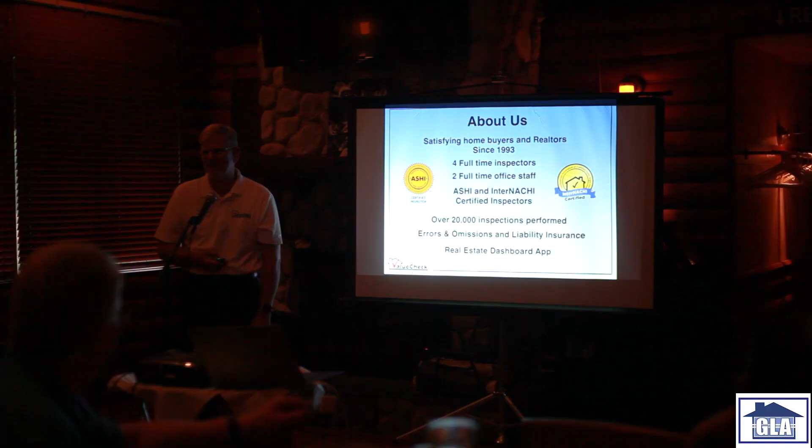Also, just for your knowledge, we're fully insured. We have errors and omissions insurance for inspection needs, but also general liability in case we're in a home and we break something, which is rare, but it can happen.

So here's a list of our services, and it's pretty much what you would expect a home inspector to do. We do residential inspections, investor inspections, commercial inspections, well and septic testing, sewer scope, which we'll talk a little bit about later. We have two sewer scopes and we do quite a bit of sewer scoping, and that could really benefit investors buying older properties or landlords, or people complaining about sewer drainage - but we can really get in there and see what's going on.

Of course, we do radon testing, mold testing, wood destroying insect inspections if you need that for VA or FHA mortgages or any other purpose. Also, we do some expert litigation work, testifying in court, and then we like to think of ourselves as historic home specialists. If you look at areas like Fenton, Holly, Flint, Flushing - so many of these places have 100-plus-year-old buildings and homes, and we do those a lot. And they all have their unique problems, right? So you kind of have to know what you're looking at.

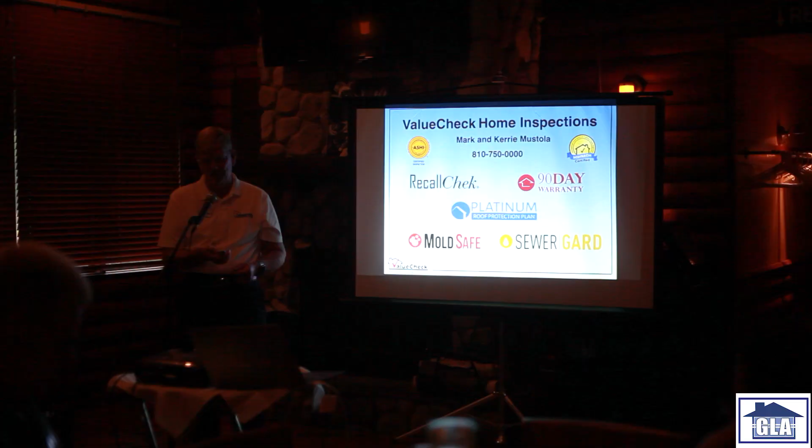I'm not going to go into these because of time, but with all of our home inspections, these are warranties and programs that just come with them. And if there was time and you wanted to talk about it, we could have described them, but that's not really what we're here to talk about.

So what we really want to start here, hopefully you can see some of these pictures. We wanted to talk about leaky foundations and leaky basements. Now this is really an excerpt - we have 12 classes that we're certified to give realtors CE credits for continuing education. So our class on foundations and leaky basements, that takes a minimum of an hour alone.

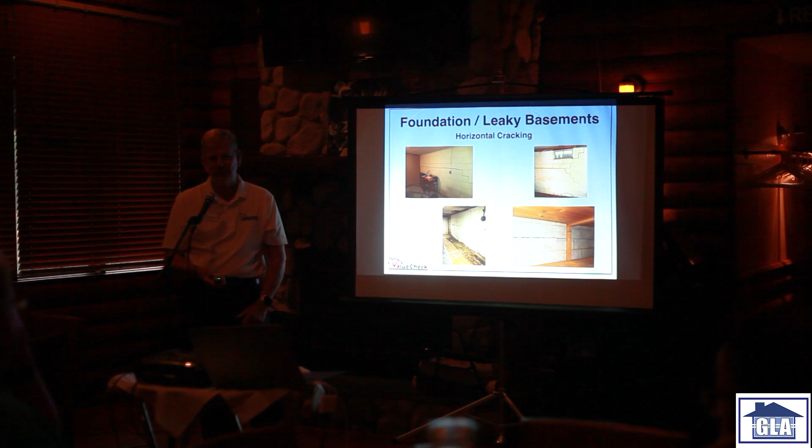So certainly when these walls are bowed in, there are repair options. I've shown several of the repair options here, I think you can see that pretty good. If you look in the upper left-hand corner, those are pilasters. Have most of you seen steel pilasters installed on walls? It's fairly common. What they're really doing is taking a steel beam - I've seen angle iron, channel iron, even 2x6s built up a couple wide - and securing that to the floor and to the ceiling of the basement. What that does is help the wall resist any further movement.

Typically when you have a big foundation repair, you want to fix the root cause and then make sure it doesn't get any worse. It's not practical to push the wall back where it was, because the only way to do that is to dig on the outside all the way down to the footing, and no one wants to do that. It'd be nice if you could, but landscaping, porches, sidewalks, driveways, patios, decks, gardens - everything is in the way. And we've already got a hole in the ground, an 8-foot hole that you could work with. So our goal is, as long as that wall is not in danger of imminent failure, let's brace the wall.

So here's some different methods. In the upper right-hand or upper left-hand corner, you see the steel pilasters. In the upper right-hand corner, those are metal plates. How many people have seen those plates on the wall? I just saw one two weeks ago, and it was a brand new repair.

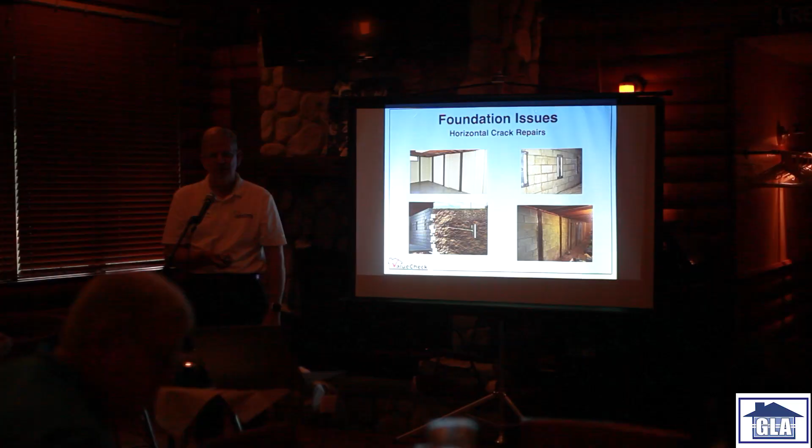So of course, when you have this wall bowed in, you're almost always going to have some water, because the root cause was the water. So what I'm trying to show you here is an example of what people call a B-dry water system. B-dry is just like saying Kleenex instead of facial tissue. It's a national company, everybody knows it, but there's lots of companies that put in these types of waterproofing systems.

And they're really very effective. So in the upper left-hand corner, that's what you're likely to see if you just walk into a basement. You can see where along the floor, the cement was broken out everywhere, and then you'll see a little plastic panel up on the wall. That's the waterproofing system.

But if you really didn't know what caused that, I've tried to give you this little diagram here. So here's your typical concrete block wall. You've got water in the soil that wants to come through the block wall, and sometimes it can come through, you see it all the way up to the frost line. Sometimes 2 or 3, 4 feet high. Other times just at the base of the floor.

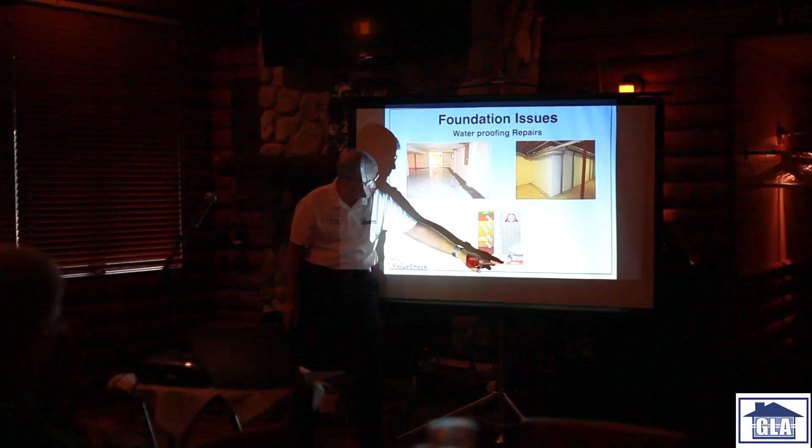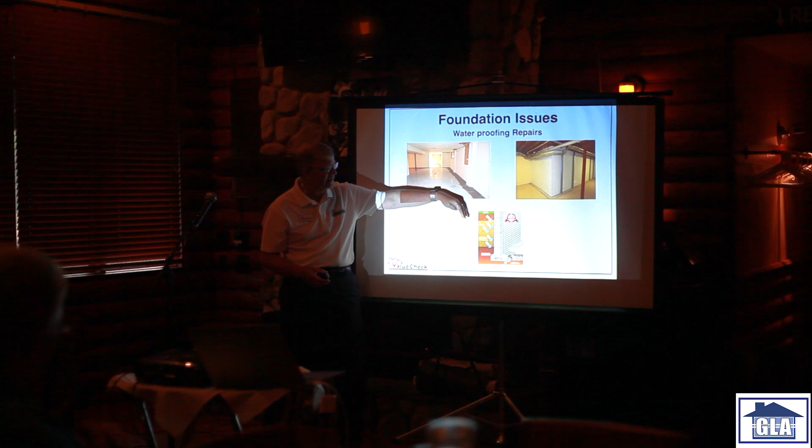So when you have a system like this, what they've done is broken out the floor to add some drain tile to collect the water, and then they'll put in the sump pump, if one doesn't exist, so they can pump that water away. And then the plastic that you see coming up on the wall, they'll drill some holes in the block, because any water that's pounding against the wall, filling the block, you want to get that out of the block wall as fast as you can, so it can't build up that additional pressure. It can't be there in the winter when it freezes.

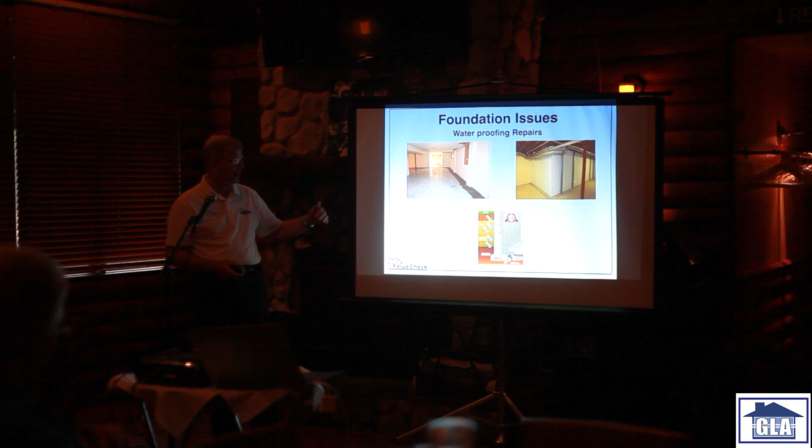So that's what we're doing. We're just trying to control the flow. We're collecting the water that's in the block, letting it come through the block, behind the plastic, and then down into the drain tile. Usually when you see those installed, most times you'll see a 20-year warranty, sometimes a lifetime warranty. They're really very effective. We've come across thousands in the 30 years that we've done this, and very rarely do we see them failing. So they're pretty reliable systems.

Now, of course, like I said with the foundation, it would always be better to fix it from the outside if you can. But it's just not practical. The expense is too great because you have to dig, so they always like to try to fix it from the basement. Same with a poured foundation when you have a vertical shrinkage crack—you're going to repair that if it's leaking water. Your best bet is just to epoxy it from the basement because you're already down there.

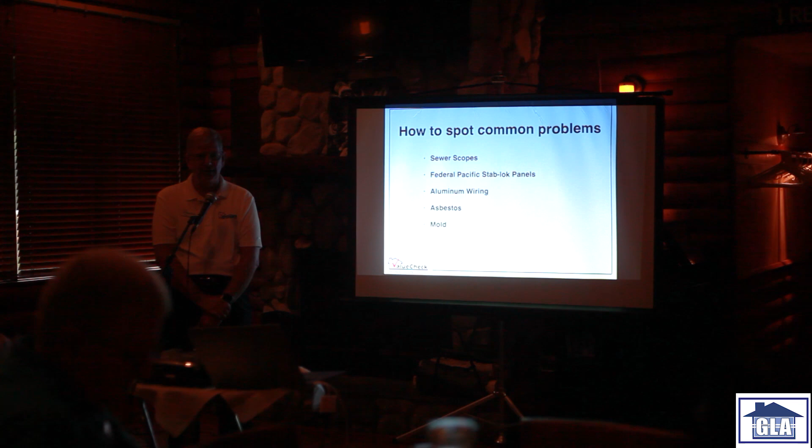So, some common problems. Well, the first thing is sewer scope. I know there's - do you do sewer scopes too, or did you just do drain cleaning?

I'm glad you addressed me, because if you guys want to see real life pictures of everything he just described to you on the basement waterproofing, I got real life pictures about everything he just did. The only thing I haven't done is those fiber straps that he was talking about, but I'm really interested in seeing how those work. I actually cut the floor just like he was describing. We drill holes in the block, lead the block. I also use the FRP board for what you were calling the B-dry system.

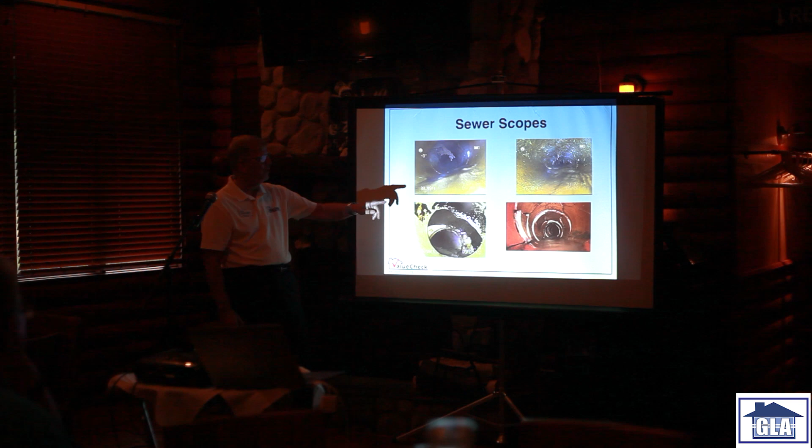This picture over here, you can see this is your drain line, so only about a quarter of that line is open. If you're looking at a house that's for sale, or a vacant house, and you run all the water, that pipe is still going to drain fine, because all you're doing is draining water down there. But as soon as you get a tenant in there and they start flushing other stuff down the toilet, it's not going through that, and you wouldn't have known it.

So in this case with tree roots, sometimes you can't see the pipe very well because the roots are in the way.

Sometimes you can't get the sewer scope past the roots if it's a big enough blockage, so you don't know the condition of the pipe. At the very least, you have to have it cleaned out, and then you'd have to have it re-scoped. This one here is a good example.

This is a house we did that was only 20 years old, and this is a big offset. Here's one pipe and here's the other pipe. It was offset so far that the majority of the sewer leaving the house was getting right out and going into the soil around the house. This was in Flushing.

I think it was like 24 years old, and it was basically from settlement. It had been like that for a while. When they built the house, the backfill against the foundation ended up settling and busted that pipe, and it was like that for a long time.

And that was $4,500 to fix it, and that was because it was just in one spot. They knew right where it was at because they dug down.

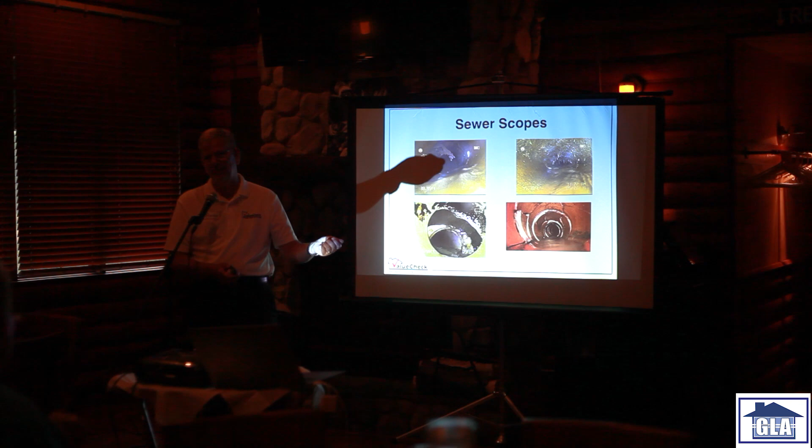Our sewer scopes, and I'm sure most sewer scopes are like this, have a counter on them, so we know exactly how far it is. So sometimes it's showing me that I took one right turn and I'm out 45 feet. I'll go out there and pace it, like, okay, this is right underneath the maple. So sometimes we can identify that.

Here's another example, that's an old clay drain tile. Almost everything you're going to see in older areas of Flint and Genesee County is still going to have clay tile going out to the road. But some of it's cast iron, and cast iron in the house, cast iron in the basement. As soon as you start getting out into the yard, it's clay tile.

Here's an example of one that over time is just deteriorating, it's broken. When you see a thing like that, when you're looking at a house, you probably wouldn't find it because the drains are still going to drain great. But there are so many offsets and broken sections that it's going to start collecting debris, and very quickly you're going to have a problem on your hands.

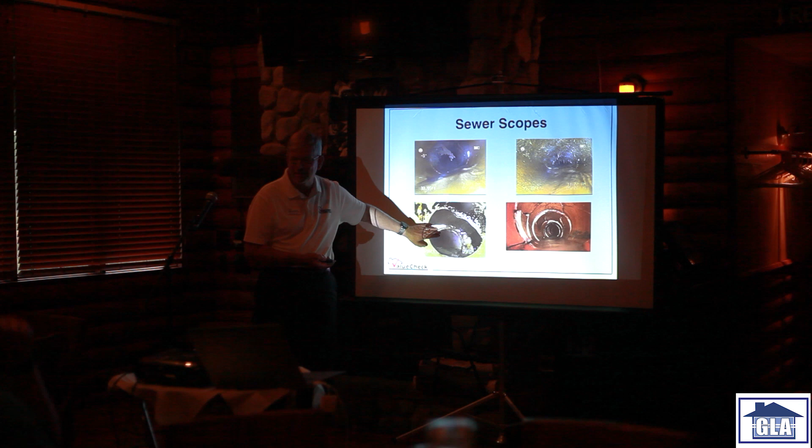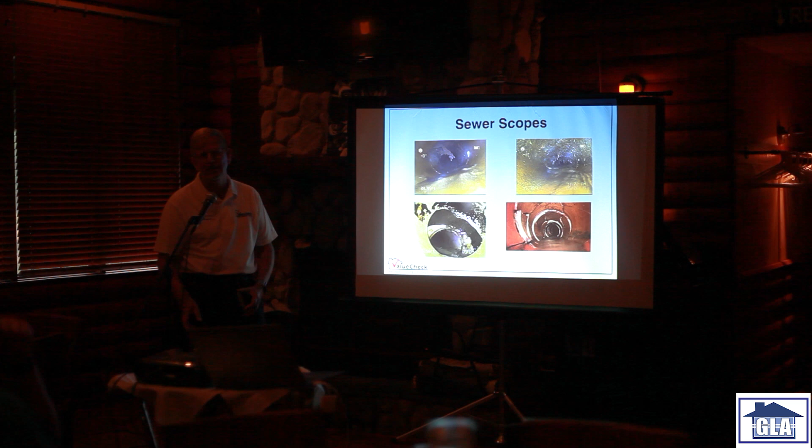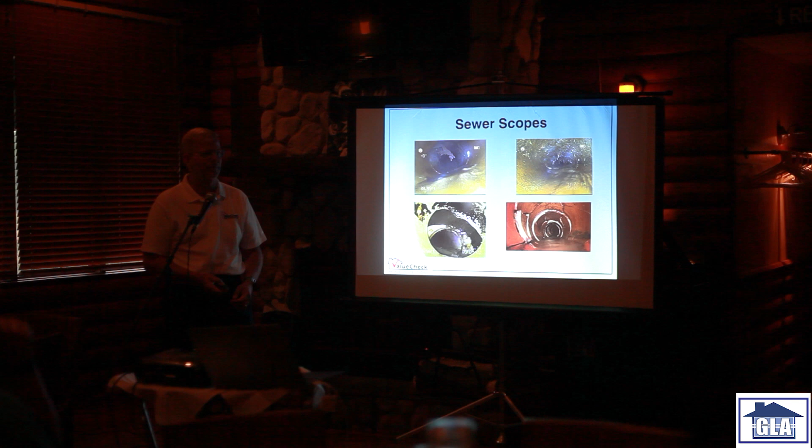Something like this, you can just dig up and replace the fitting. Something like that is just going to require replacement of the pipes. There's multiple ways to replace it - I know we don't want to get into a lot of it. Sometimes they dig it up and replace it all. Sometimes there's a system called pipe bursting where they can dig every 20 feet and pull a new pipe through and burst it along. There's also a cured-in-place system. So there's multiple ways to fix it.

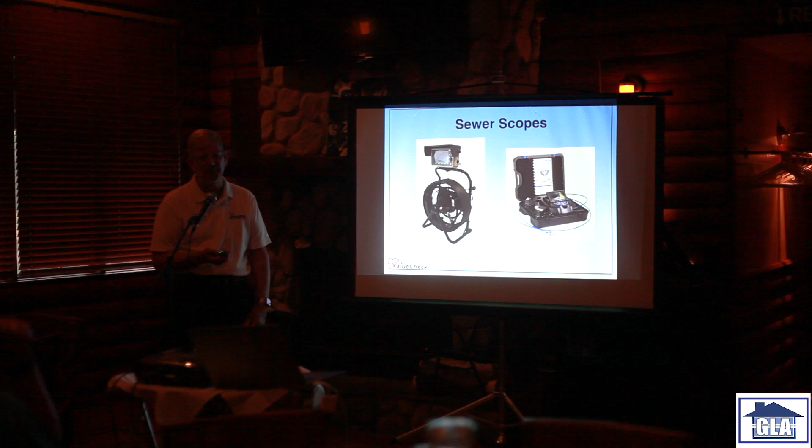That's just a picture of the two sewer scopes that we have. They're pretty expensive pieces of equipment, but they're very nice. We can get you a color video of the entire underground line so you can see the condition.

So have any of you run across these or had problems with it? Had one today. Yeah? Yeah. Yep, so I mean, we see these probably at least once a month. I didn't have the other stuff.

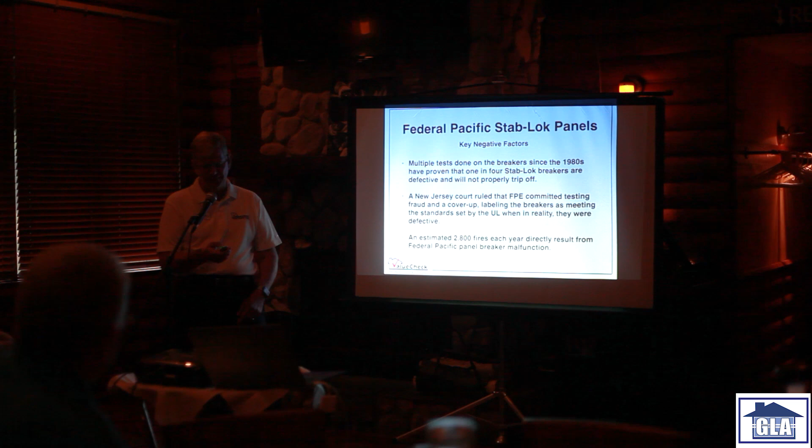So here's the key negative factors. Basically, the U.S. Product Safety Commission says that about 1 in 4 breakers is just not going to trip off in an overcurrent situation. So something is overheating, somebody may be being shocked, and the breakers are just going to fail. The U.S. Product Safety Commission says these panels need to be replaced if you run across them.

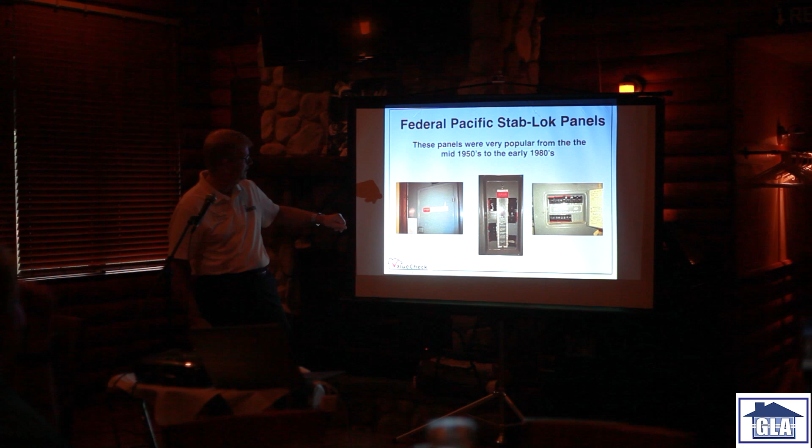If you hire a home inspector, or anybody, an electrician that comes in to do work, if they see this, that's the answer. And they're pretty identifiable to you, because they all have this distinctive red tab - the breakers are tipped in red. That's the only panel that looks like that. But it says Federal Pacific Stab-Lok.

You can Google that tonight because I think you'll find it very interesting. It's STAB-LOK, that's how they spell stab lock.

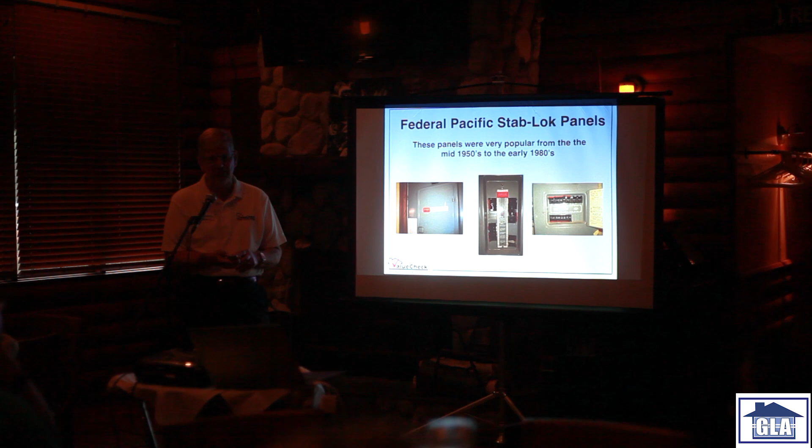So if you're looking at buying a house, if you've got a tenant complaining about electric problems and you walk downstairs and see that stab lock panel, just know that's going to have to be replaced. And it's still reasonable, what's it cost to get an electric panel upgraded? Anywhere from $1,000 to $1,500. There's a pretty wide range, so it's not the end of the world. But if you're looking at a house, every $1,500 you have to spend is $1,500 out of your profit that you'd like not to deal with if you can push that onto somebody else, like the seller, of course.

Aluminum wiring. We have a lot of aluminum wiring in Genesee County, I'm not sure if you're aware of that. Aluminum wiring was used primarily between the mid-60s and the mid-70s. The U.S. Product Safety Commission says that a house with aluminum wiring is 55 times more likely to have a fire than a house with copper wiring.

And once this was discovered, that's why starting roughly around 1975, they stopped using aluminum wire on 120 volt circuits. Now, we still use aluminum wiring every day on new construction for the service coming in from the meter and for your 240 volt circuits, like your stove, air conditioner, hot water heaters, dryers, but you can't use them on the 120 volt circuits.

And the problem with aluminum wiring is that it's very volatile. It's a soft metal, it doesn't resist being installed or bent very well. It's easy to damage and crack. But the biggest problem is because the aluminum is soft, it tends to expand and contract when it gets warm. So you have problems at the connections, like light switches, outlets, light fixtures, things like that.

And believe it or not, you probably know it, if you go buy just an outlet at Home Depot, some of them are rated for copper, some will say CO/AL for copper and aluminum. So if you go to change all your outlets to make them look nice and new, and you buy the cheapest 47-cent outlet you can get, it's not going to be rated for aluminum wire.

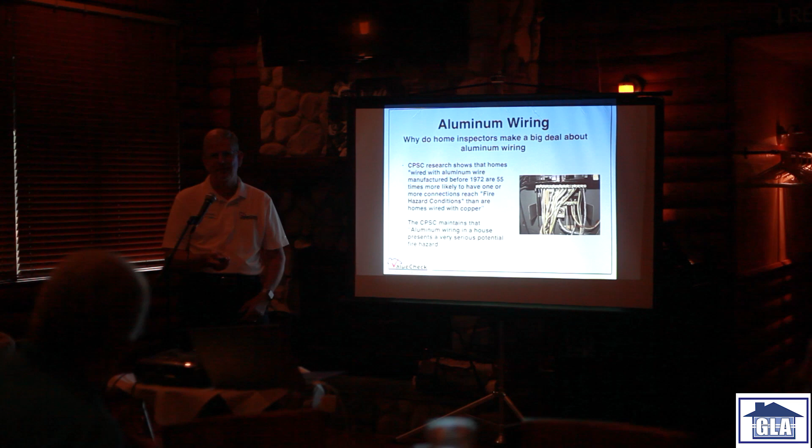No, that helps a lot. So, okay, we kind of talked about that. So there are some repair options, right? I don't want to get into all the detail, but I'll just talk about these two.

So there are 4 main methods to repair aluminum wiring. The one on the bottom is what we see the most. So it's not practical to rewire a house.

In the National Electrical Code and the Consumer Product Safety Commission, neither one recommends or says you should rewire the house with aluminum wiring. What they say is you need to have somebody sit at every one of these fixtures, pull out every outlet, switch, everything, and inspect the connection. And what they want to do is take a short copper pigtail, connect it to that aluminum wire, and then use that pigtail to connect to your switch, outlet, or fixture.

So in the upper right-hand corner, that's really the best method out there because each wire is in its own slot. It has a screw. There's actually a torque rating. Electricians have screwdrivers that are similar to a torque wrench. You can adjust it so you know exactly how many foot-pounds of pressure you put on that screw, so you know you've got a good stable connection.

They're more labor intensive and you don't see them very often. That purple Ideal wire nut at the bottom, that's an acceptable method and that's what we typically look for. So if you were going to hire an electrician, typically what he's going to do is at each connection use that Ideal connector because that's approved by the NEC and the CPSC for that.

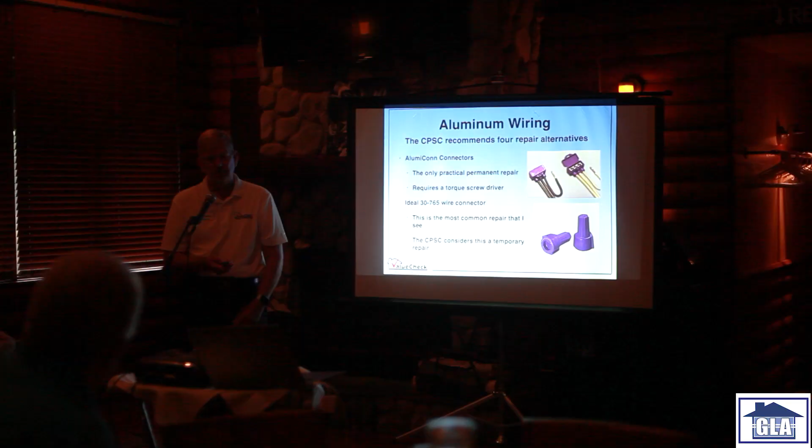Okay, asbestos, we're going to talk a little bit about, I know I'm probably running out of time. Everybody knows what asbestos is, so we're not going to get into all the detail. We'll just talk about these, the 6 most common types of asbestos that we're going to see in houses in Genesee County. This one right here is the one I would be most worried about.

You go into a house that had an old boiler, and you've got this old asbestos wrap on the pipes, and it's always friable, you see chunks of it hanging down. That's in really rough condition, and that probably is going to need some professional remediation, and I would really figure that into your cost.

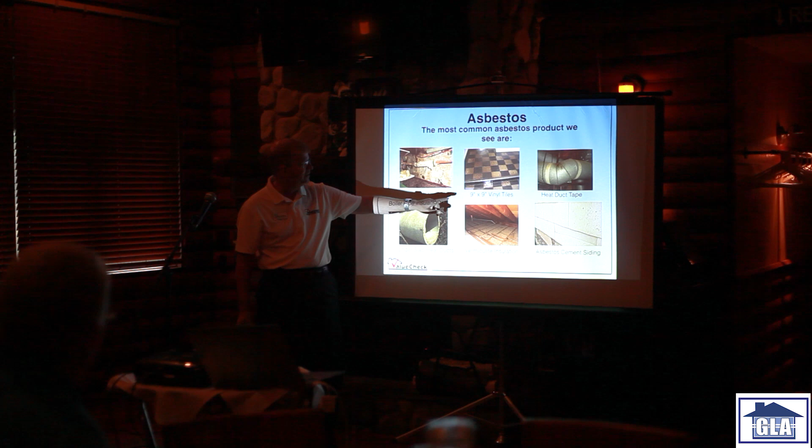Probably the most common one we always see are these old 9x9 vinyl and asbestos floor tiles. I know everybody has seen those, the little shuffleboard patterns in the basement, and the vast majority of those contain asbestos. For the most part, they're perfectly safe. So if you look at that picture, I would tell somebody yeah, that most likely contains asbestos, but I wouldn't worry about it, it's perfectly safe like that.

Where you end up having problems is when you see that people have scraped them off the floor. And by the way, that black mastic that's oozing down, most of that mastic had asbestos in it as well. So when people want to scrape up those old tiles, they're really just releasing the asbestos fibers.

The next time you see where they can be problematic is going back to the wet basements. So you go into a house in Flint, the middle of the floor looks like it's brand new even though it was done in the 40s, but you walk around the perimeter of the basement, and you can hear it.

The tiles will be popping when you walk on it, and you'll see some of the mastic oozing up from the joints. Those tiles are deteriorating from the water, and that's when you're getting the asbestos release. The biggest problem is when you can step on them and hear them tap on the floor. That's considered an impact surface.

We're not going to talk about this today, but it's the same thing with lead paint in old houses. Lead paint on your door frame is not an issue. Lead paint on a wood double-hung window that's rubbing up and down, where you're constantly scraping the paint and releasing dust, that becomes the issue.

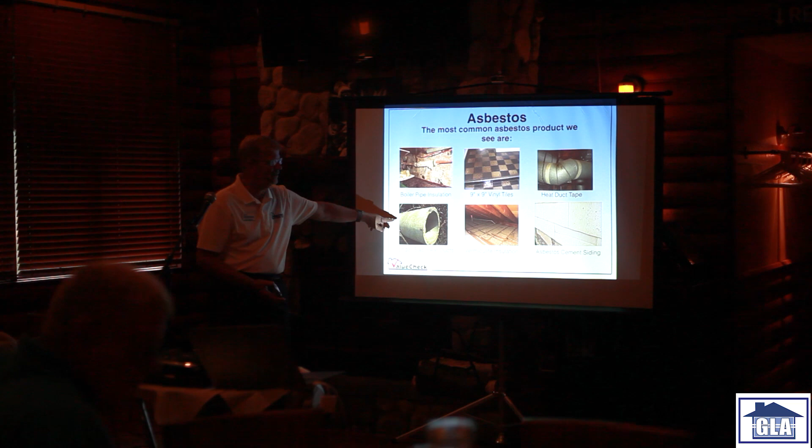Down here, asbestos cement siding - we could drive around all day and point that out. Same with this transite pipe. That's just pure Portland cement with asbestos fibers mixed in as an aggregate, like a binding agent. The fiber held the cement together, much like you'd put mesh or rebar in your driveway when you poured it. The fibers held it together.

That siding, we wouldn't make a big deal about it, but you'd want to know about it. You shouldn't be scraping, grinding, or sanding it to paint it. You might power wash it and put a good coat of paint underneath, but it's pretty stable. Most people probably aren't going to get too excited about it.

Then the last one I wanted to talk about was this, very common vermiculite insulation. Probably most of you know about vermiculite. Back when the Flint Journal was really a big paper, they'd run an article almost every January about vermiculite, and it would scare all kinds of people in Flint, and we'd get tons of calls and go out there and look at it.

Most vermiculite contains asbestos, but it didn't contain it naturally. You can still buy vermiculite today - go into any garden store, they mix it in with potting soil because it absorbs water and holds it, then releases it back into the soil. It has great properties, and in its own right it didn't have asbestos, but almost 90% of the nation's supply came from mines in Libby, Montana, and 50 miles away were the same mines where they were mining asbestos, run by the same company. So they cross-contaminated in their storage bins and packaging equipment, and put it in paper bags to sell to stores.

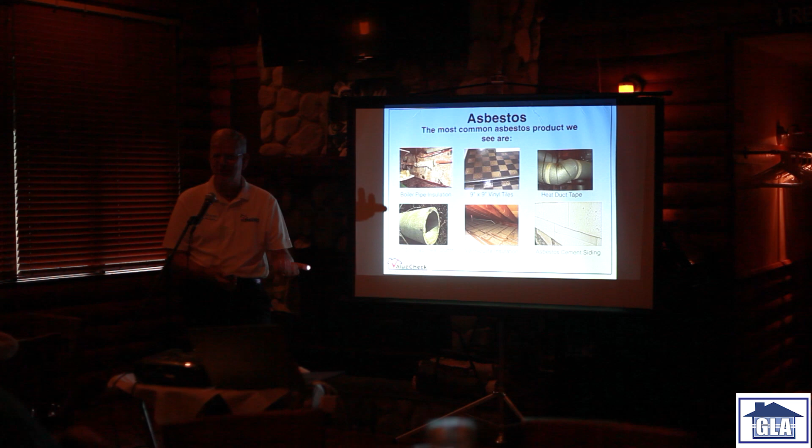They're saying if it's in the attic, you probably want to hire somebody. I wouldn't blow cellulose or anything that would disturb it, but you might hire a company to carefully roll fiberglass over it. So it's the same thing - you're basically encapsulating, putting a layer of something between you and the vermiculite or asbestos so people don't disturb it and release asbestos into the air.

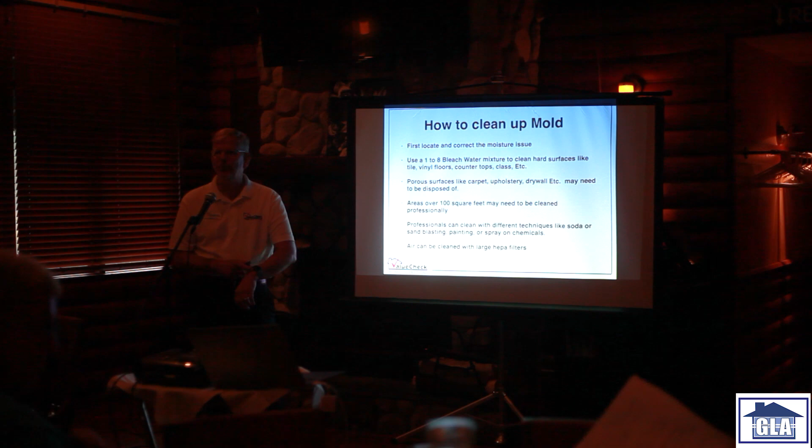Mold, just talk a little bit about mold. I don't want to get into all the health benefits and what mold is, we can just get into... Ed, how much do you want me to wrap it up? I'm probably past my half hour. Gary says skip the mold. I did get the hook off sometimes.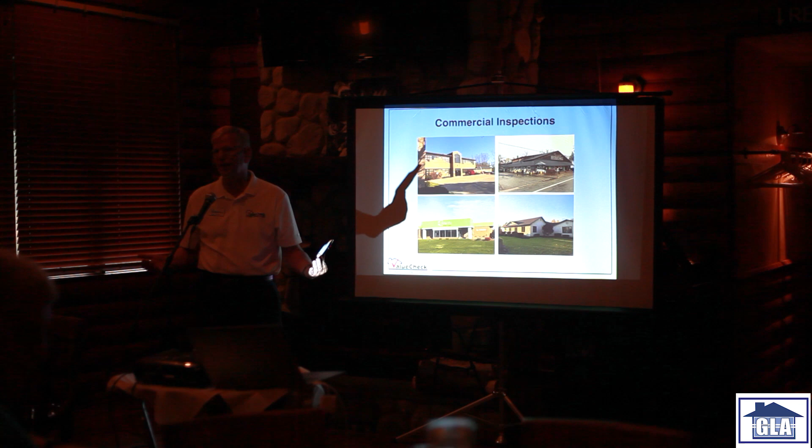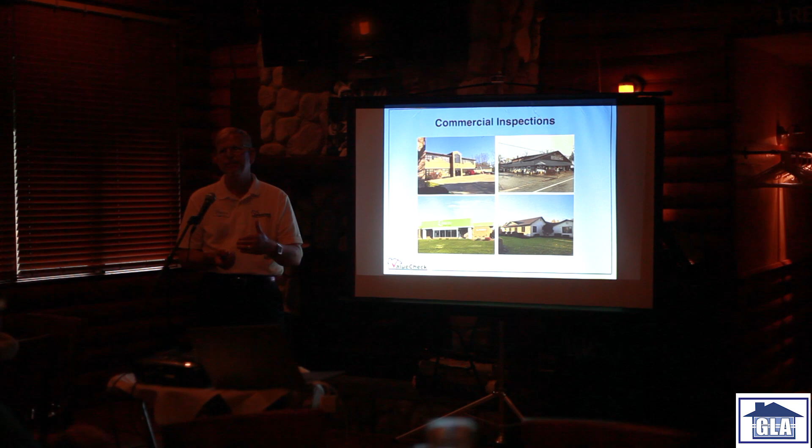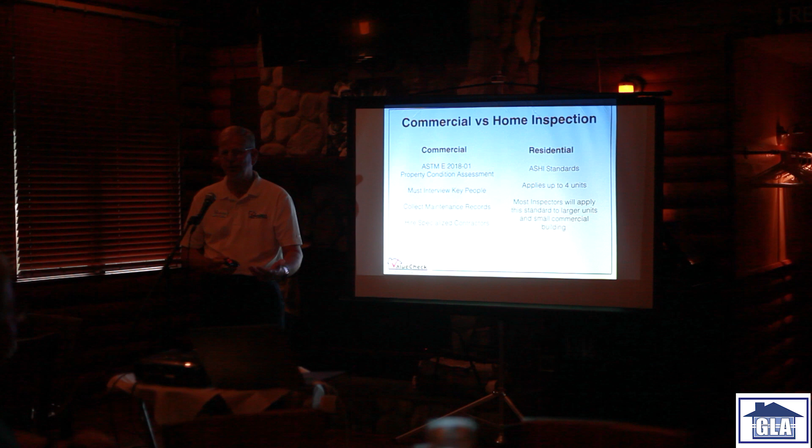We do a lot of commercial buildings. We've done 3 funeral homes, more than a half dozen churches, a couple hotels, countless dentist offices, doctor's offices, retail stores, party stores. Besides home inspections, we also do commercial inspections. We treat them pretty much the same as a house, because most inspectors doing commercial inspections aren't going to inspect the actual equipment in the building. So if you have a restaurant, I will inspect it, but I'm looking at the structure, the roof, electrical, heating and cooling, the plumbing systems - not your fryers and walk-in equipment. This is really the last thing to talk about: the difference between commercial and residential home inspections.

Residential home inspections are typically done to a standard established by ASHI, the American Society of Home Inspectors. There's another good group called InterNACHI, with almost identical standards. But those standards typically only apply to units up to a 4-unit apartment building. Once you get into something bigger, ideally you'd go to a second set of standards, the ASTM E2018-01. That standard is a lot more intensive than a home inspection, because part of what they want you to do is gather all the maintenance records, hire individual contractors to come in and evaluate rooftop package units, elevators, escalators, and things like that. You don't see that done unless you're talking about a substantial commercial project where you're paying thousands and thousands of dollars for this assessment to figure out what you have.

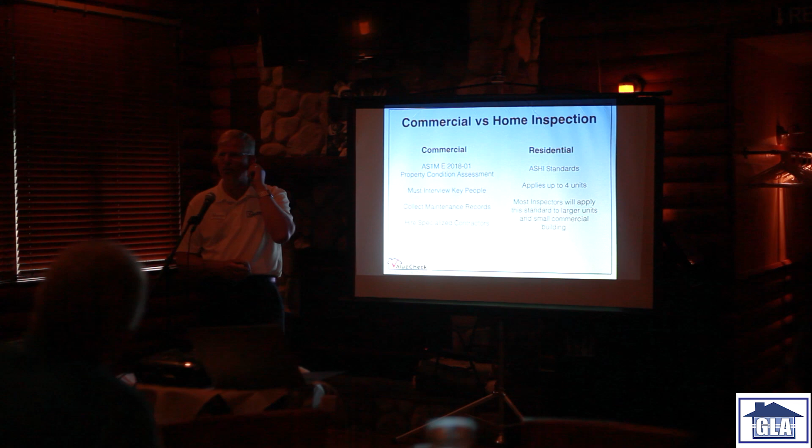Contractually, any standard to inspect a commercial building is fine as long as the inspector and the customer wanting the inspection agree to it. So we focus on just the main things, and that applies to anything - any commercial building either has a wood frame wall or a concrete block wall, a wood frame roof or trusses. It's all very similar, just on a larger scale.

So Ed's up there with the hook - one more thing, because it's going to make it harder to get me off the stage. Like I said, we've got 12 classes, so I've touched a little bit on the classes we offer, all basically an hour long. We would have gone into a lot more detail, so we're always willing to come back and talk more. Carrie's going to put a stack of our business cards on the back. Are we done? Thank you.